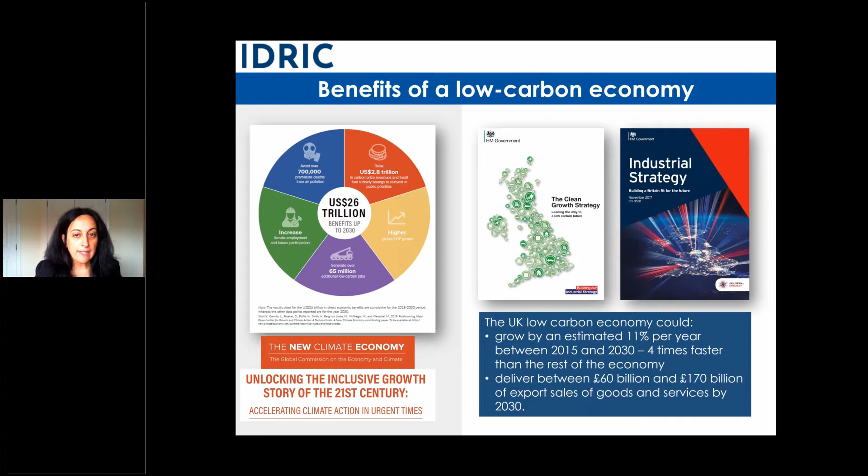So what does this mean from the point of view of the UK setting up this net zero target? Well, if I have to summarize it in just a few words, really what the net zero target means is that there is no place to hide. That's basically what it means.

And I'm saying relatively, because there's really nothing easy in decarbonization. But we have decarbonized to a really large extent our power sector, our power generation, and that is why that overall number of our CO2 emissions is coming down. What we have ahead of us is actually those sectors that are really difficult to decarbonize.

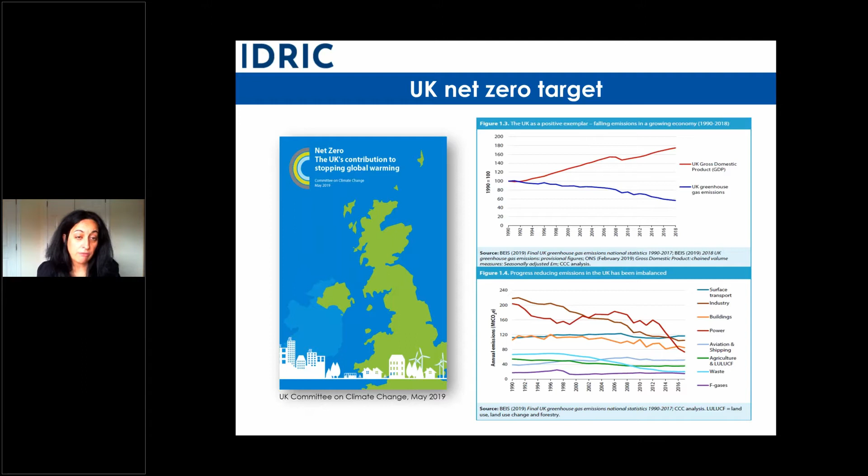So that's really the picture. Going forward, we're going to have to do a lot of different things, and not the easy ones, as I said.

So what mechanisms we have in place, I want to add that these mechanisms are not going to achieve everything that we need to do to decarbonize. These are very important, critical steps right now, but we're going to need a lot more joint efforts to decarbonize the UK.

So that's cement, steel, glass, paper, chemicals, and ceramics. These sectors in the UK, we shouldn't underestimate - they actually produce 52 billion of our UK economy, but they have to be decarbonized.

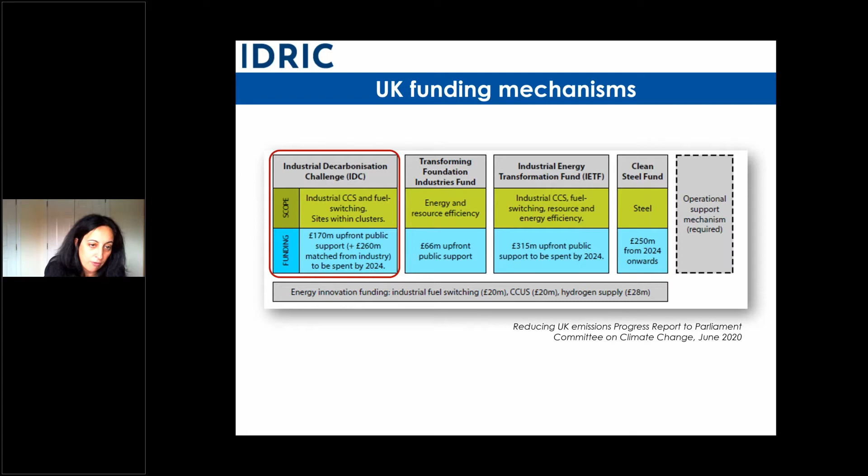All those together, collectively, produce around 40 million tons of CO2 per year. To put this in context - roughly we're looking at around 8%, 7 to 8, below 10% of emissions in the UK. So by taking care of emissions from these clusters, we can go a long way. Remember, these are difficult to decarbonize sectors in reaching our net zero target.

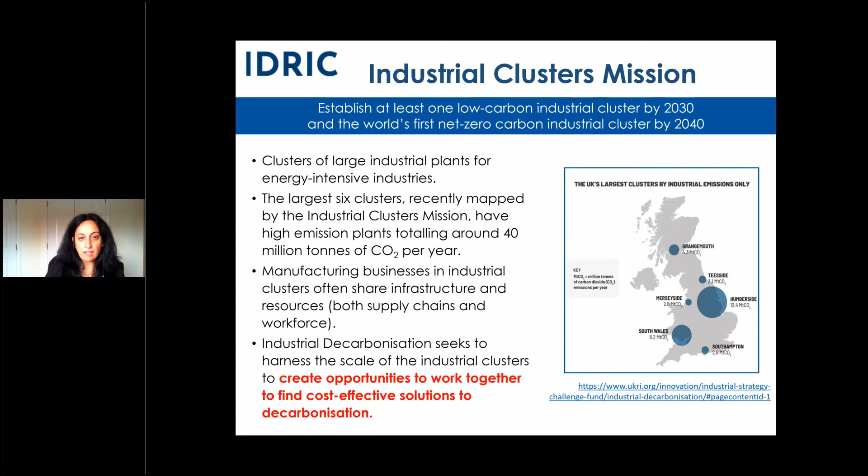The industrial cluster mission - the banner in blue with white letters - is that we want to establish at least one low-carbon industrial cluster by 2030, and the world's first net zero industrial cluster by 2040. Again, this won't be everything we need to do to decarbonize, but it's a significant step in that direction.

So I already mentioned the size of the program. Maybe the other point to mention here is that the overall IDC or Industrial Clusters Mission is divided into 3 activities, or 3 strands. There's a strand focusing on industrial demonstrators and shared infrastructure, which is 132 million and administered by Innovate. A second key element of this mission is the cluster decarbonization roadmaps, or cluster plans as they're known now - an 8 million program, also administered by Innovate.

And the third element that you have there, and that's what I'm going to be focusing on, is the Industrial Decarbonization Research and Innovation Center. That's a 20 million program administered through the Engineering and Physical Sciences Research Council, EPSRC.

A message I want to give here is that the program has 3 elements, but those 3 elements work very closely together, and that's the intention going forward. We do need those 3 together working, because that will be the way to really deliver the objectives of the mission.

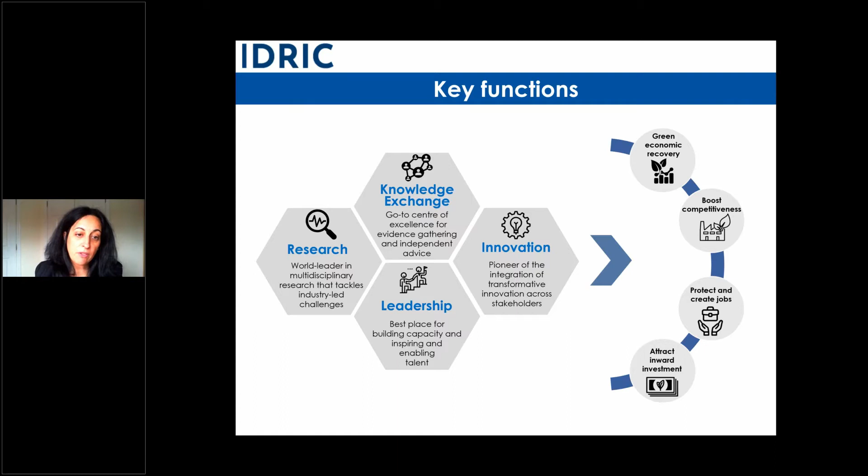Ultimately what we want is that these regions not only stay and flourish, but also attract inward investment. So I've been talking about IDRIC and stakeholders in the community. We actually have 142 partners, 142 different entities. These 142 organizations have come out with a 10 million match support to the funding of 20 million that we are requesting from UKRI.

If you want to see who they are, it's a really good spread. We have 23 research organizations, 74 industrial partners, 35 associations, NGOs, trade organizations, and also working alongside very closely with policymakers and different government bodies and departments.

A little bit more now in terms of the challenges we will be addressing. I think the first key message here is that when you look at emissions globally, they represent around 28% CO2 emissions for energy intensive industries. In the case of the UK, it's more around 21%. Those numbers, of course, may have fluctuated over the last months.

But what I want you to see here is that there are significant regional differences. In the case of Asia, particularly China, not surprisingly, energy intensive industries are much more dominated by non-metallic minerals - meaning cement, ceramics, and iron and steel. If you look at Europe, what we have is actually a more even distribution between non-metallic, iron and steel, and chemicals.

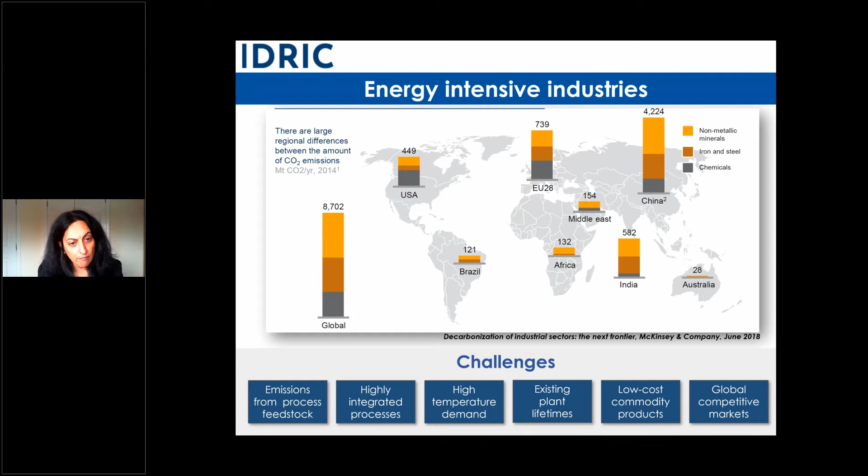So these are the challenges that we will be addressing as part of the Industrial Decarbonisation Research and Innovation Centre, IDRIC. In terms of the options, I'm not going to go into detail.

The options that we have from a technology perspective are around switching to different types of fuels. You can be thinking in terms of hydrogen, in terms of improving efficiency, in terms of how we can electrify heat, energy vectors, CCS, and also other innovations that will be coming along the way.

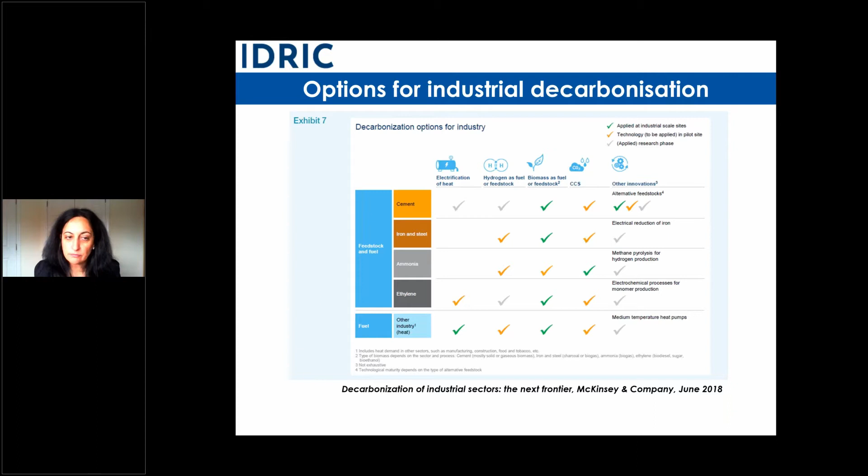Now, important to keep alongside that is that we are going to have different routes. We need to look at this from a holistic point of view. So it's not just a low carbon technology, but also things we can do from the demand side or from energy efficiency, and try to make sure we look at this from a really complete life cycle approach when we look at the chemical sector.

On the right-hand side of that slide, the key message is that there is a time for these technologies. Some of those technologies are already mature and we will be looking to deploy them, or strategies to be deployed straight away. Other technologies or approaches will actually be coming later on. And again, we are going to need every single tool that we have in our toolbox to be able to reach net zero target.

What IDRIC is aiming here to provide is a supporting foundation for technology and policy development. I want to reinforce this because, yes, it is important that we develop and deploy technology - without that, we are not going to reach net zero targets. But when we do that, we need to make sure we also have the policy, the business models and the regulatory framework, and of course the skills related to all of the above.

So project examples, just kind of very generally - we are looking at projects that will help us to reduce cost, reduce risk, reduce the timelines, obviously reduce emissions, and as well linked with all of the above, economic and policy aspects.

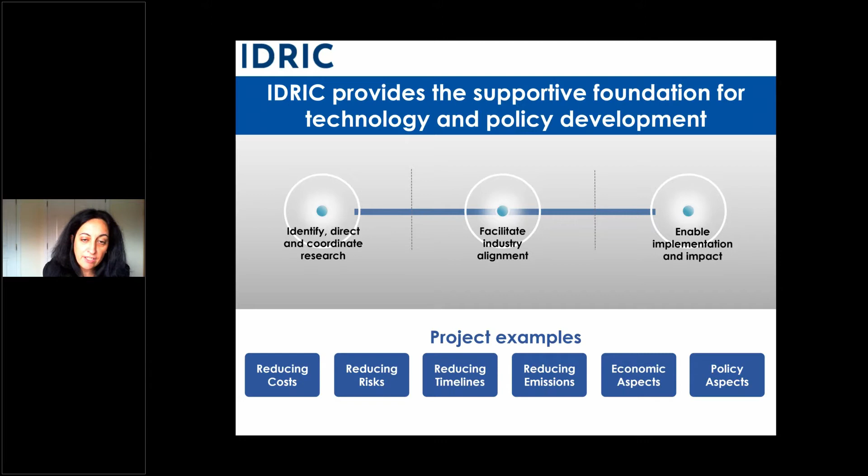The approach that we have taken is we have identified a challenge led from industry. We have facilitated industry alignment for every one of the projects. And this also ultimately will allow us to enable the implementation and the impact of these solutions.

So in summary, how IDRIC can help the UK reach its industrial decarbonisation goals: we will be putting together this research and innovation program, with these industry-led challenges. We are also forming a very active network of stakeholders, as you saw from the number of partners.

And really together, we're going to be growing the skills. We're going to be sharing the knowledge and supporting the policy and providing the evidence needed in some cases to actually get these policy and regulatory frameworks in place.

I have mentioned this several times, but really collaboration is key. Over the last months, we also have published a series of editorials, opinion pieces in different magazines focused around the chemical sector, focused on cement, on steel.

There is one, if I can highlight your attention to the one on the left-hand side, Accelerating Decarbonization. This has just been published in the Chemistry and Industry magazine that is part of SCI.

One final message here, I'm sure this will be mentioned by the coming speakers as well and in the coming webinars: collaboration is key. The role of the industrial chemical sector is key. But also what we need to keep in mind is that by decarbonizing the chemistry sector, the chemical industries, we are actually helping to decarbonize low carbon manufacturing at large.

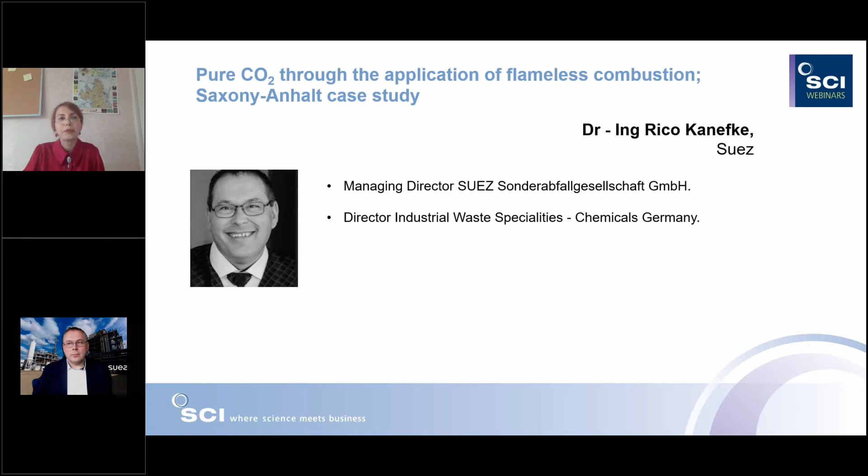Great, thank you for the opportunity to be here. Yes, so I'm working for SUEZ, a French company, one of the global leaders in environmental protection, water, waste, and for sure technology and recycling.

I want to tell you a little bit about a case study we started in the region in Germany. It's the Middle Germany chemical region. And we started a study to check how waste-based carbon could be used to defossilize the chemical production.

Thank you for the opportunity to speak here. I'm an environmental engineer, so I learned to combine environmental protection and industrial needs, and that's my daily job now at SUEZ.

At SUEZ, our purpose is, we think, that we are faced with demographic growth, climate change, and a lot of social and geographical inequalities. So our job for the future and now is shaping a sustainable environment now by keeping for sure the possibilities to produce.

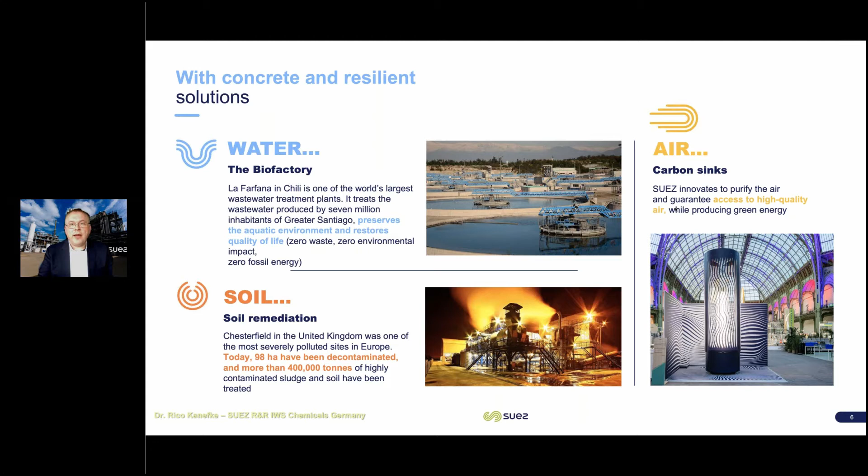And we're working on all the points. It's water, it could be soil, but now I'm talking today about the air and the carbon sinks. So SUEZ is working on innovations for purifying the air, but also working with our industrial clients to defossilize and decarbonize their production.

So let me say a few words about my place in the SUEZ company. I'm the managing director of Industrial Waste Specialties Chemicals in Germany.

Industrial Waste Specialties is a European business unit which is mainly dedicated to hazardous waste recovery and industrial solutions. That means we are in the middle of the real chemical production, and our customers discuss how to drive their business and how to have their business in the future without CO2 emissions while keeping the business working.

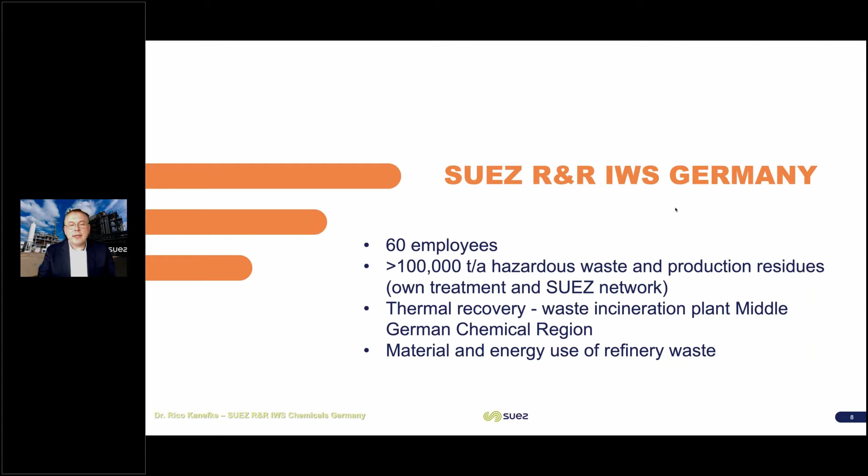So in Germany, we have 60 employees, more than 100,000 tons of hazardous waste. At the moment, we are working with thermal recovery of hazardous waste, an incineration plant in the Middle German chemical region, and also working in the refineries for material and energy recovery.

Let me talk a little bit. The case study we started is in the Middle German chemical region. This is really 100 years and more than 100 years of chemistry.

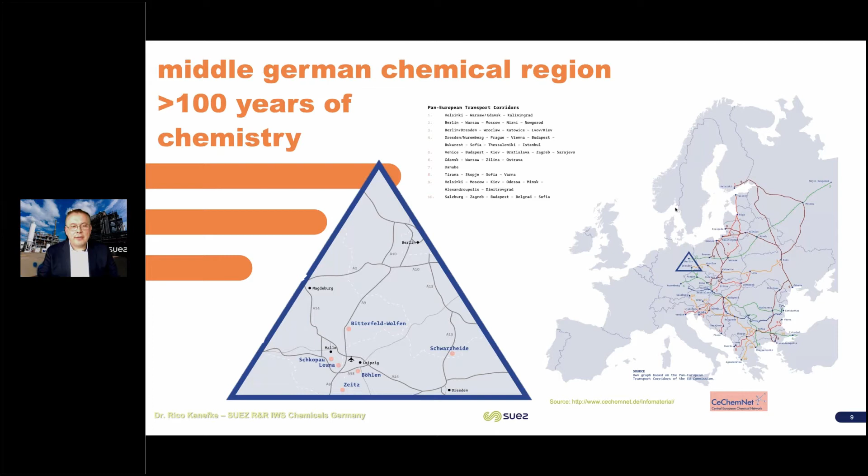And you see where it is, the triangle, the chemical triangle we are actually talking about and working in. This is the eastern part of Germany. You also have a lot of chemical plants in the western part of Germany, but we are situated in this chemical triangle, with more than 100 years of chemistry history. So let me explain a little bit this picture.

Maybe it's hard to read and I won't go into all the details in the short term, but you see a lot of different sites there working on polymers, chemicals, and refinery products. It's mainly based on, and in former years was based on, plastics production, ground chemicals and acids. And there is a lot of pipelines, a lot of working together with intermediate products which is needed at a different site.

We are located in two of these sites I mentioned, the Schkopau site and the Leuna site with our companies. At the moment, this is the status now, we are using our industrial and technical possibilities for thermal utilization of waste from production residues, solvents, hazardous waste mainly, but also non-hazardous waste if it fits, depending on the feedstock we need. For example, in Leuna we make a preparation for the energetic use and material recovery of refinery waste, solvents, and also more complicated mixed waste. So this is what we do now and where we are located.

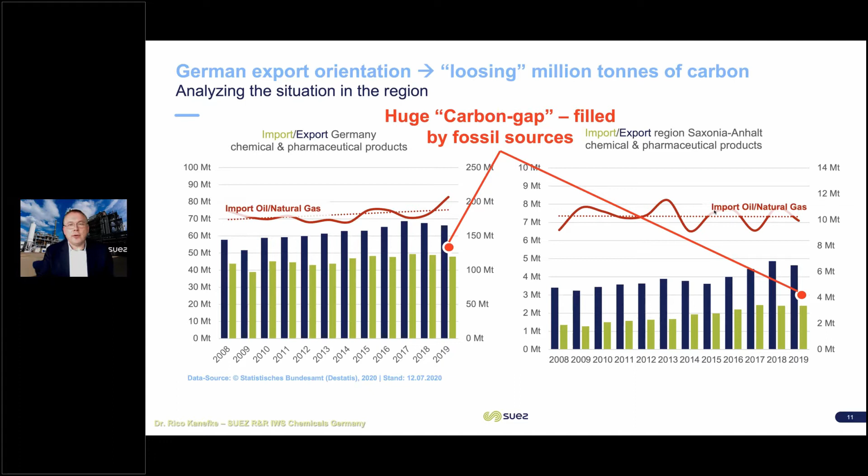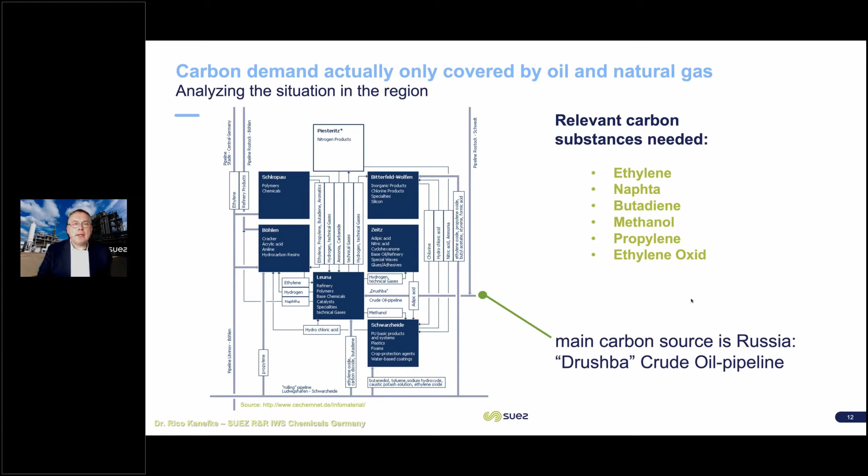If you look again at the picture I showed you before, for the relevant carbon substances needed now in this whole system of chemical companies, you have ethylene, naphtha, butadiene, methanol, and so on. And the main carbon source and area is Russia. We have, from historical times, a good pipeline, the so-called Drushba pipeline coming from Russia, and every bit of carbon we lose, we fill mainly from this pipeline. So we are in this area mainly focused on chemistry based on fossil sources.

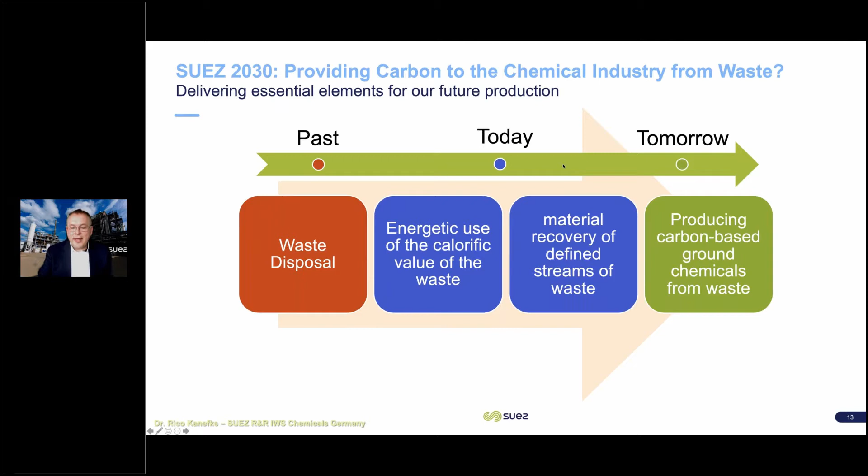So if you look at SUEZ and also other companies dealing with waste, we come from a background of clear waste disposal. We are now in a situation where we use the energy of the waste. We do some material recovery depending on the different streams, like paper, like solvents, also more complicated stuff, but it's only for defined streams. We want to come tomorrow to, let's say, producing ground chemicals from waste. SUEZ 2030 is our broad program to do that. So our case study is what we can do with our known technology, with our knowledge about real industrial technology, to provide for the future the ground chemicals we need in this area - maybe not only in this area, but I'll focus on that.

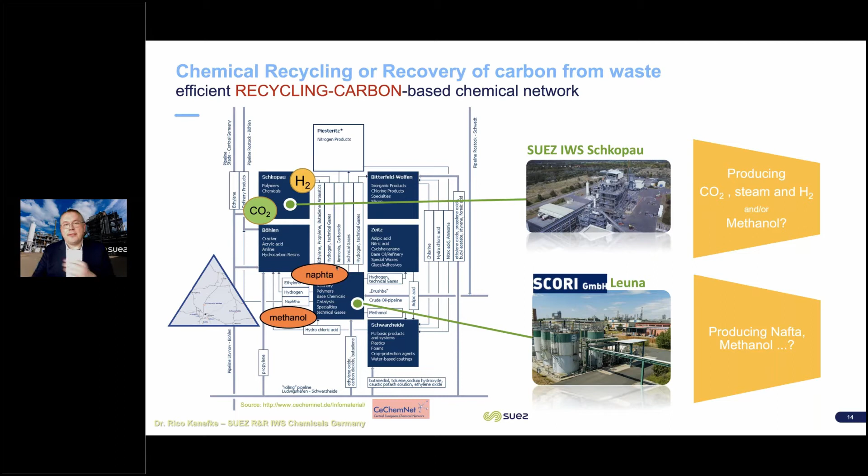What we know already is how to produce CO2. We produce it during our production of energy out of the waste, and for sure we could do way more. So we want to switch the carbon-based chemical network not to a non-carbon-based chemical network. We want to switch it to a recycling carbon-based network.

We are not talking only about CO2. CO2 is only one part of this chemistry. We are talking about hydrogen. We are talking about combined products, methanol, which could be produced from CO2 and hydrogen. But maybe you can also have some carbon sources directly from waste.

So for SUEZ, we are technology open and target open. That means we look at what our customers need, and then we implement the solutions, and we check what are the new technologies. Universities study new products, maybe new catalysts, whatever we can use to bring back the material out of the waste. And therefore we say, I say, we use materials formerly known as waste to have the carbon feedstock for the future.

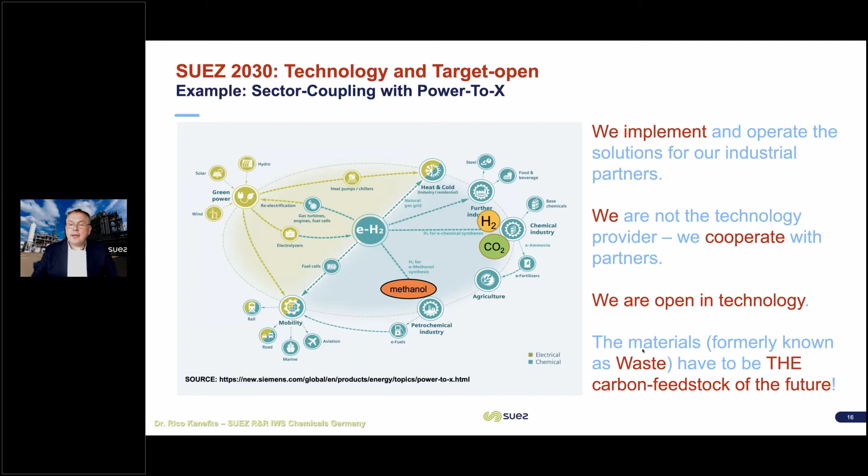So you could also work on very complicated pictures. It's not the time to do that now, and I won't show you a lot of numbers. But we're working with all the materials and all the possibilities. You saw also biomass, for example, in the presentation before, mixed waste, hazardous waste. We have all this feedstock already for using that for creating energy, fuels, and so on. And now it's time to step forward to use this feedstock in different processes to provide the ground materials for the chemical industry.

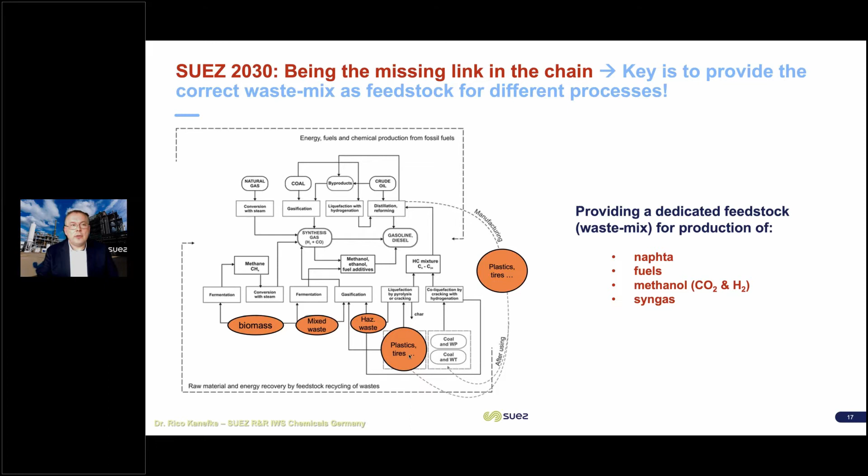Let me show you one example in this study. Thanks to ITEA, Dr. Figini, we worked since some years together with the technology they invented, and we checked where we can use it in our processes. One of the partners, I told you we are technology open, but this could be a solution. I want to introduce this flameless pressurized oxycombustion as the source of waste-based carbon.

So CO2 we also have in our normal incineration plant now, but this is more efficient. If you look not only on financials - we heard also it's always between material, financials, and CO2 savings - if you look on producing CO2, this is a different approach. Then this could be a good idea.

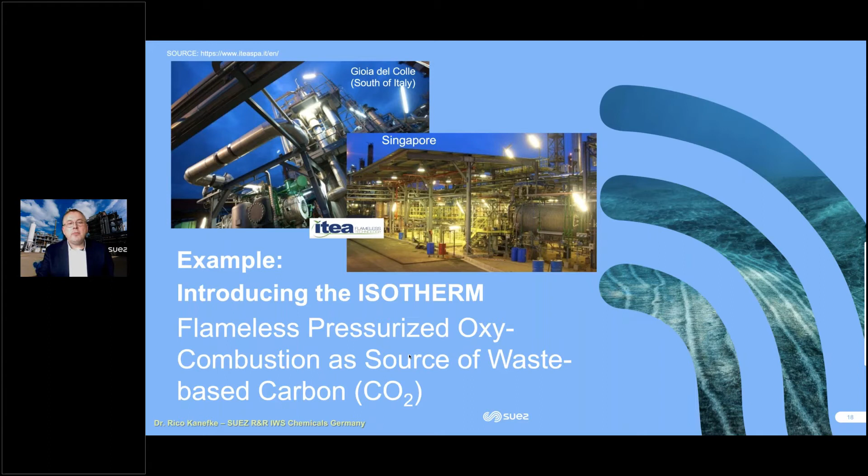If you look at this process, you see it's not a classical incineration, it's an oxidation reactor. So incineration is also an oxidation, but here we're working really only with oxygen instead of air, and we use it with fuel or slurries. The fuel here is waste.

I don't go too much into detail, but the steps are oxidizing, energy recovery, and at the end CO2 recovery. That means this process could provide energy and at the same time CO2 out of a dedicated waste stream. And this is what we check in this area for chemical production.

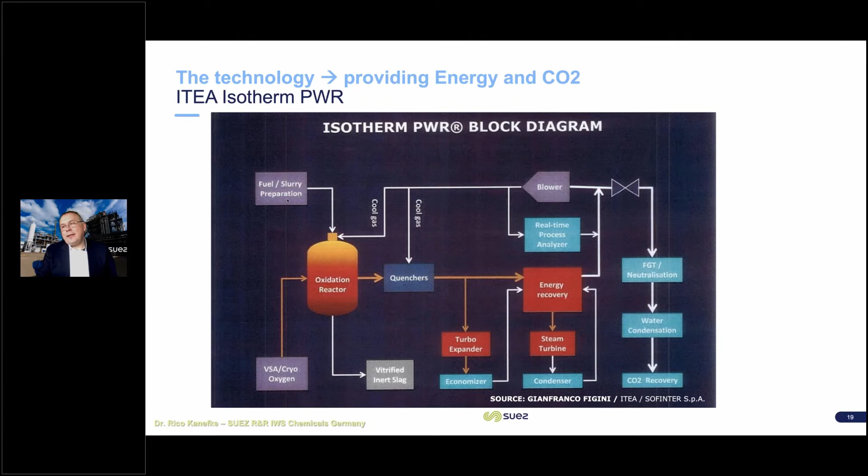What are the advantages or maybe the disadvantages of oxycombustion? For sure, with oxycombustion, because you don't have the nitrogen in the air, you have the mass and volume of the flue gases strictly reduced. That means your plants will be much smaller, much more efficient to build, because you don't have to use the nitrogen of the air for the incineration, and you don't want to have it. So the flue gas at the end is mainly CO2, which makes it very easy and more efficient to capture.

If you don't incinerate nitrogen-containing waste - because otherwise you have the nitrogen from the air - you normally have no NOx emissions, and you have also less heat loss because your flue gas is smaller, and you can build your plant also smaller and more efficient.

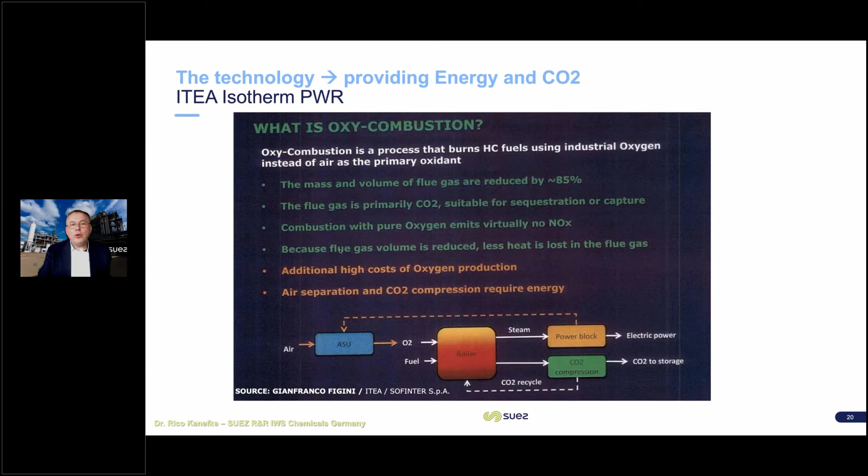On the opposite side, talking about costs, yeah for sure, you have to get the oxygen, and oxygen is more expensive than air - everybody knows that. But this is one point we have to face. And for sure, you need air separation units, and you need CO2 compression or CCUS systems compared to a standard incineration. But we think these are low costs, to be honest, compared to what we get.

For example, I'm not talking about all the possibilities - you can read it in a lot of papers - how to go from CO2 to CO to methanol, including hydrogen and so on, with electrocatalytic reactions. This is not my point here, but we have these technologies, and I think we're getting nearer to an industrial technology here. But I want to show you how we could and how we want to use this in the future.

I start from the incineration. I could also start from the product life cycle. If you have a cycle, then you can start wherever you want.

So I start with the flameless oxy-combustion, for example, which creates energy and CO2. Then you go through these reactions and all the other possibilities to get from CO2 to something you need. In our chemical parks around the middle German chemical region, you need CO2 directly, but also methanol and other carbon-based stuff for chemical production. You need more energy than you can create from the waste, but we can use energy from renewables, so this isn't really a CO2 problem for us. There could be a good combination between the two.

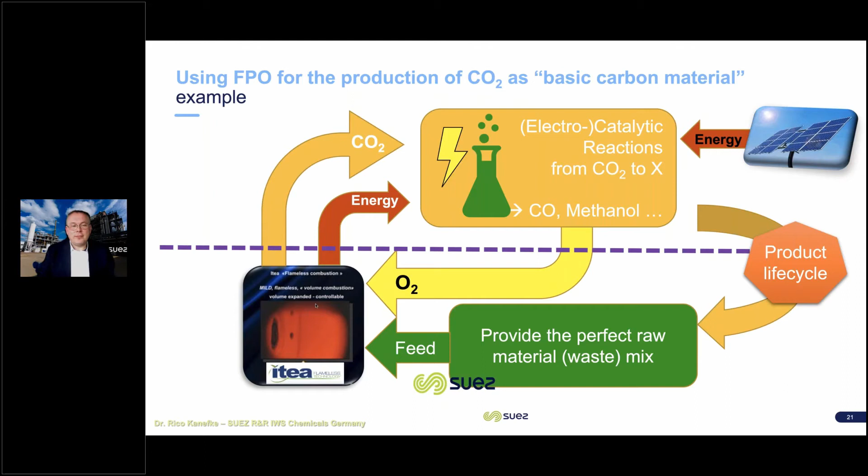If you look at this carbon cycle, SUEZ wants to be the missing link in this chain. You have the chemical companies, they've produced for over 100 years methanol or other carbon-based products like plastics. We know the production of carbon substances like methanol now. Then you have the product life cycle. We know how to collect the secondary material, and we also know how to provide a new carbon source from this material. We also look at what is the best solution: is it a small, flexible on-site solution, or maybe a large-scale one to prevent too much transport?

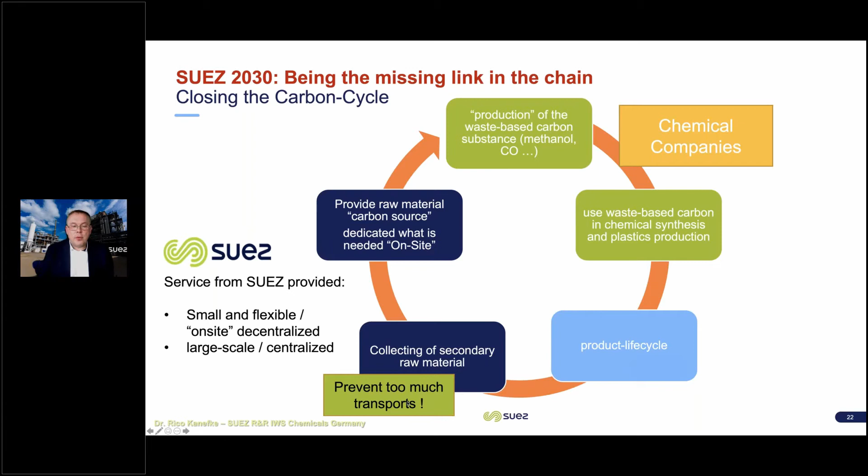Just to show, it's not only incineration or oxy-combustion, we are technically open and look at different possibilities too. I want to show you a second example from the UK. I think since 2013 there's a plant, Cynar and Suez, the first secondary fuel plant, which uses plastic, again a carbon source, through different steps, not getting to CO2 but getting to diesel fuel.

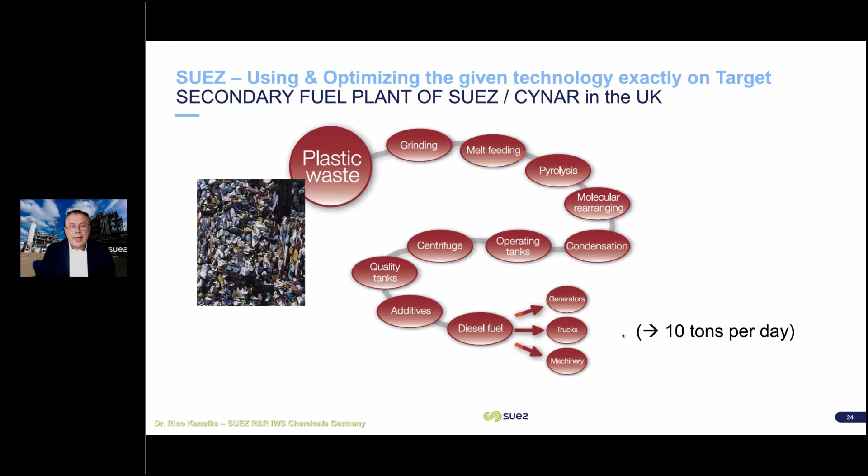But to be honest, whatever you do, it helps you decarbonize your chemical production. Looking at the time I have, I think I have to come to an end soon. I want to summarize - sorry for not going more into numbers and details of the processes. If you are interested, please contact us. Collaboration is key.

Yeah, we heard that before, it's the same for us. We are only one part of this chain, but what we see is that it's possible, and it will be possible in the near future. We are not talking about centuries, we are talking about years, maybe. But we are not so far away from defossilizing the chemical production.

If you look at Germany and our region, we have to close this carbon gap because we cannot always import oil. So we're using the waste - formerly known as waste, now secondary raw material - instead of fossil sources. Besides the standard sorting and standard recycling we all know, we now use chemical recycling, for example, by producing CO2.

As a company we know since long time the needs of our chemical production, and we want to fit to it. It's very key to be technology open - there will not be one technology, there will be, in our case, a lot of technologies that have to fit into the chemical production. We can solve the problem of the different technologies by providing the perfect dedicated feedstock for them. For example, these technologies like the ITEA isotherm oxycombustion I've shown you can efficiently provide CO2, which can also at the end be used as ground product for the chemical industry from a dedicated feedstock we provide.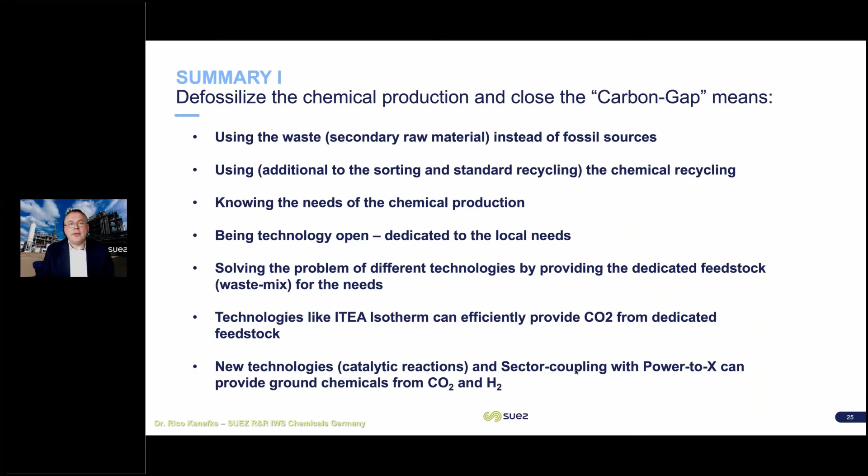No, it's raw material, and this is also very important to know. If you look to SUEZ 2030, we want to be the missing link in this carbon chain, not only in carbon, but in this carbon chain.

So we use the carbon sources from the materials formerly known as waste, not only in the Middle Germany region, but we are very near there now. And we do that to prevent CO2 emissions.

We think it's the only way to secure this chemical production in this region for the future. Otherwise, we have to stop that, so it would be a huge impact on this region.

It's also reducing our dependence from oil, gas, and countries like Russia. It's not only a dependence on the carbon or the oil, it's also a dependence on the countries. And we think it is the way to keep our wealth in this region for the future. Maybe it's the only way, because besides the chemical industry, there's not much in this region.

So let me thank you for your time, and I hope I kept my time. And sorry for not having more detail, but you see, we are not so far away from using CO2 as ground material for chemical production.

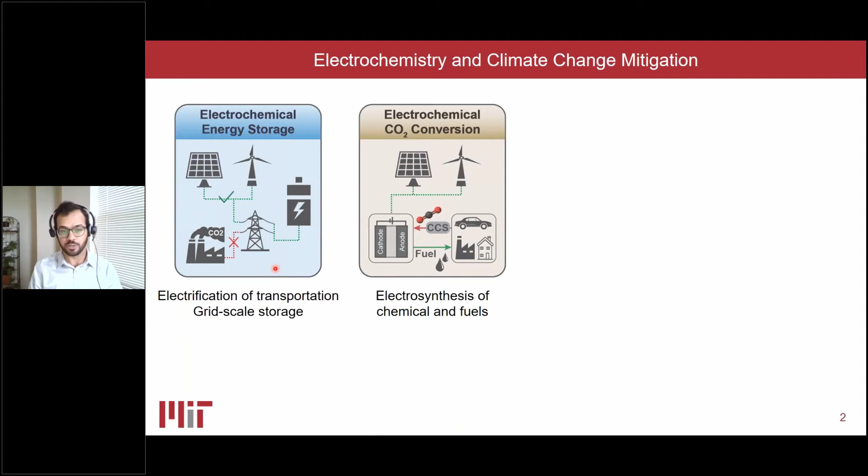The other example of using electrochemistry for tackling climate change is electrochemical CO2 conversion, in which we use renewables as a source of energy and CO2 as the initial material to produce chemicals and fuels. These two technologies help climate change by avoiding further emission of CO2 and by reducing fossil fuel consumption—rather than fossil fuel, we rely on renewables or these new chemicals or fuels produced through electrochemical CO2 conversion.

Another way we can use electrochemistry to tackle climate change is using electrochemical processes for carbon capture and storage, which is considered to be a new frontier of electrochemistry for climate change. This technology helps by avoiding further emission, by capturing CO2, and it can also serve as a negative emission technology.

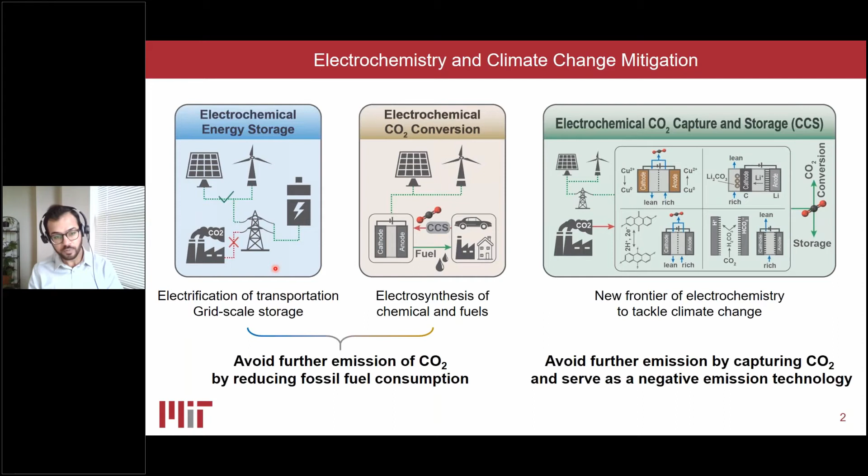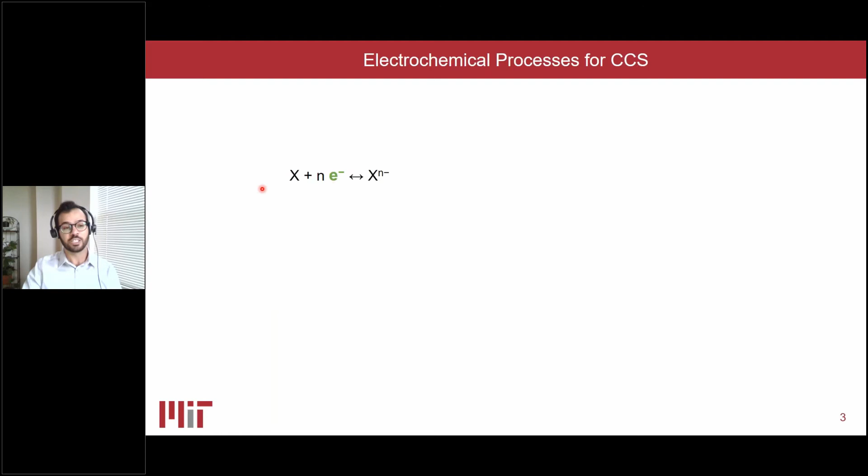So the main focus of my talk today is electrochemical CO2 capture processes. To refresh your mind, an electrochemical reaction is basically a chemical reaction with electrons. Having this electron in the reaction gives us the ability to integrate renewable sources of energy and electricity as a driving force to go forward with the reaction, or go backward and generate electrical current, like when we discharge our cell phone battery.

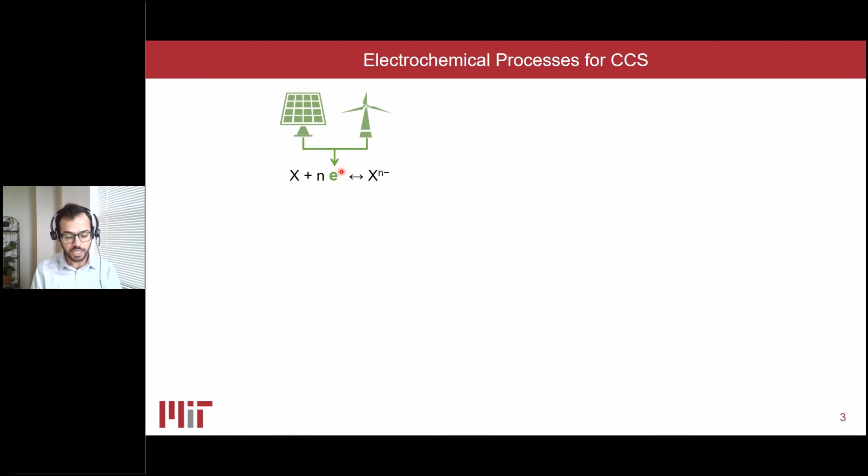Electrochemical systems have unique advantages. For example, they rely on renewables, they are modular so it's easy to scale up, and it's easy to retrofit—it's a plug and play system. So why not use this as a new alternative for carbon capture, as an additional asset to technologies we already have, like absorption or membrane-based systems?

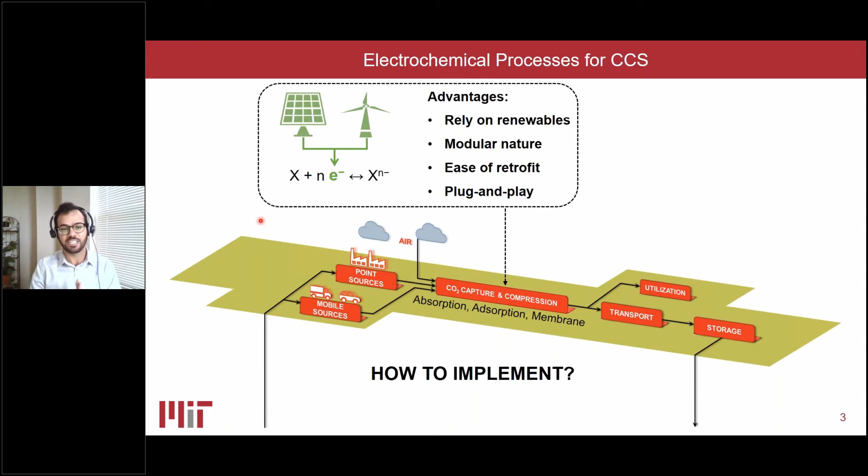This can be implemented for carbon capture from different sources, for example air, other point sources, and mobile sources. But the key question here is how to translate these fundamentals of electrochemistry into a system that can selectively capture CO2 from a mixture.

In this talk, I'm going to review 4 groups of approaches that we can use to translate electrochemical fundamentals into a system that can selectively capture CO2. For the first 3, I'm going to overview the process, and I'm going to spend more time on the 4th one, electrochemically mediated amine regeneration, to give you a taste of how we can go from fundamentals all the way to designing a system that can be used for industrial flue gas, for example.

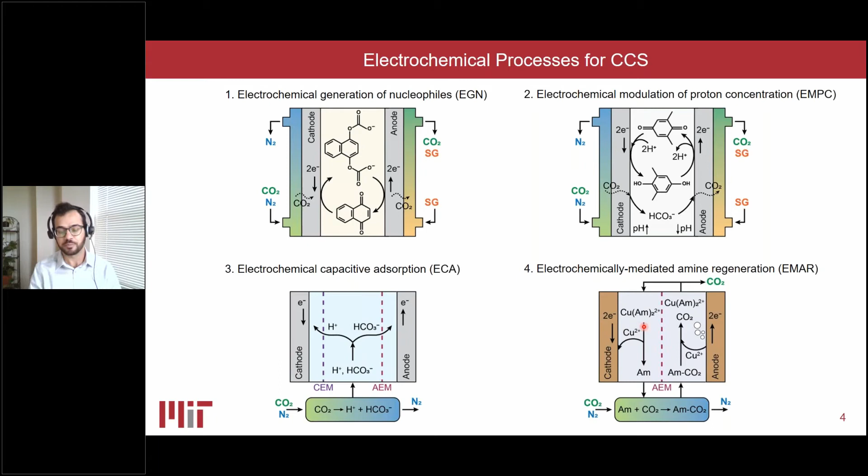For the first one, we have electrochemical generation of nucleophiles. The core idea is we electrochemically generate a nucleophilic center, for example, using an organic molecule like a quinone molecule. By reducing this, we generate a nucleophilic center which is attractive for CO2 from its electrophilic carbon center.

As a result of this reduction, we have a chemical reaction with CO2, so we can selectively capture CO2 through this reaction. In order to regenerate this molecule and produce a pure stream of CO2, we just need to go backward with this reaction, doing the oxidation of this molecule. So by going back and forth between oxidation and reduction, we can selectively capture CO2 and then remove it as a pure form of gas.

Quinone, of course, is not the only example. There are other examples, such as bipyridine or thiolate. The key similarity between all of these molecules is that by reduction of them, we produce a nucleophilic center which can selectively capture CO2. To use this fundamental in a system, I'm giving you a schematic that shows how a process relying on this mechanism works.

On one hand, we have a mixture of CO2, let's say with nitrogen. We have a gas diffusion electrode, and on the cathode, where we do the reduction of this molecule, we selectively capture CO2. Then, on the other side of the cell, we oxidize this molecule in order to release CO2 in its pure form, which we can wash out using a sweep gas.

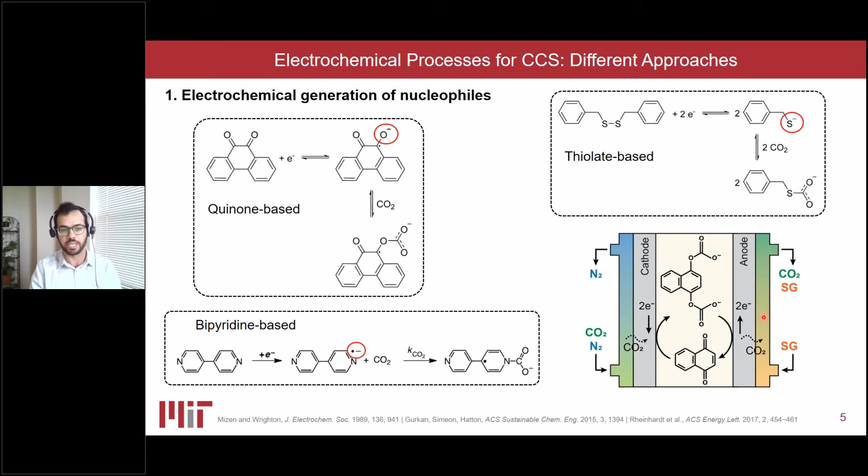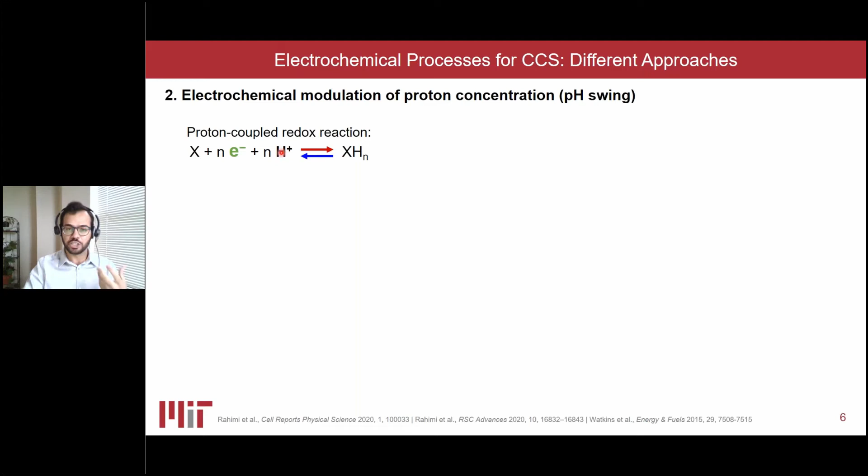The other way is using electrochemical modulation of proton concentration, or pH swing. A group of electrochemical reactions called proton-coupled redox reactions, in which in addition to electron transfer, we also have proton transfer. That means if we go forward with this reaction, we consume protons, and if we go backward, we generate protons. That means we can play with the pH of a solution.

We also know that CO2 solubility is a pH-dependent process. That means we can absorb CO2 as bicarbonate and carbonate at higher pH and desorb it at low pH. So basically, taking advantage of this pH sensitivity, combining it with a reaction that can modulate pH, we can design a system that captures CO2 as bicarbonate and carbonate and desorbs it as CO2 gas.

So this system's mechanism is relatively simple, but the kinetics might be slow because of the slow kinetics of the absorption itself. People use this type of mechanism to design systems.

For example, here they used a soluble organic molecule with a proton-coupled redox reaction, in which by reduction of that molecule, involving protons, they can locally increase the pH. So they absorb CO2 as bicarbonate on this side of the cell.

Then, by doing the reverse reaction—in this case we have hydroquinone and benzoquinone—by oxidizing the hydroquinone, the pH of this section of the reactor goes down, and then we can desorb CO2 in the form of gas. Similar to the previous system, we just use a sweep gas to wash it out.

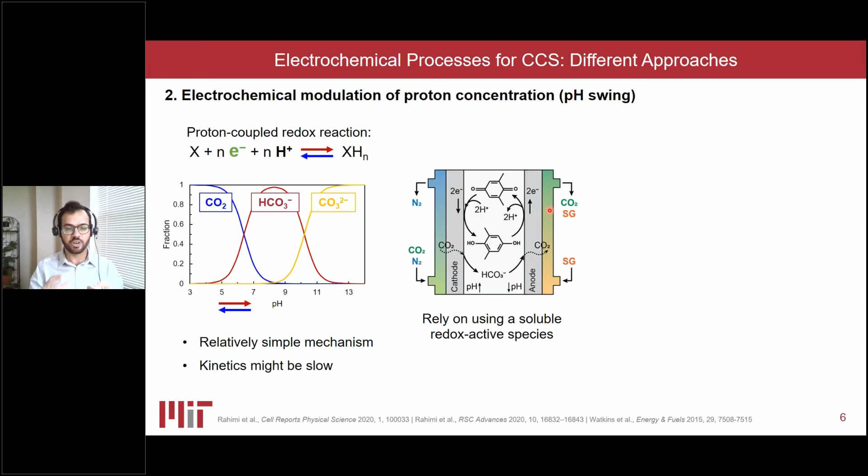This relies on an organic molecule which is soluble and redox active. We can also use an electrode that can host protons. In that case, the electrode itself can intercalate and deintercalate protons in order to modulate this change in pH.

For this particular configuration, I'm using an absorber, absorbing CO2 as bicarbonate using, let's say, potassium carbonate, sending it to the anode chamber of that electrochemical cell, which is separated using an anion exchange membrane. Here, I'm increasing the pH in one chamber and decreasing the pH of another particular chamber by introducing protons, playing with the equilibrium of bicarbonate and carbon dioxide in order to remove CO2.

Then, on the other hand, I'm regenerating the pH in order to make it ready for further absorption and sending it back to the absorber. So basically, we're taking advantage of CO2's sensitivity towards pH and playing with electrochemistry in order to capture and release CO2 selectively.

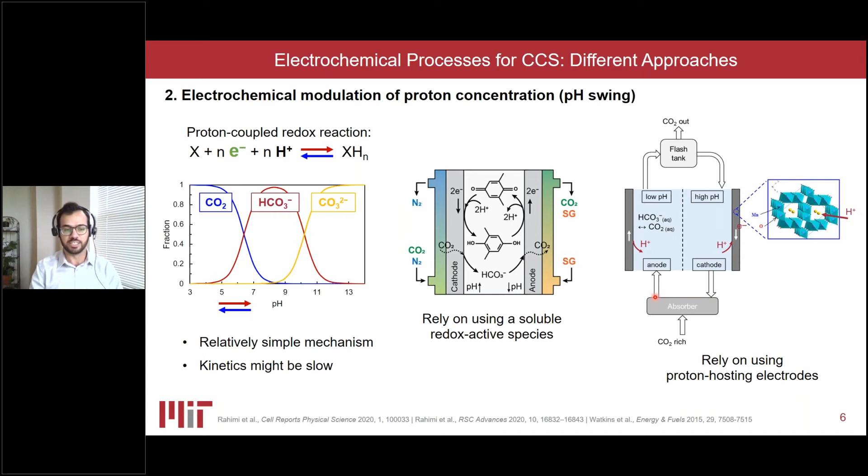So the third mechanism is relying on a capacitance, electrochemical capacitive adsorption. Similar to the previous case, I'm absorbing CO2 using an absorber, then absorbing as bicarbonate, and then sending it to an electrochemical cell, a capacitance.

In this case, what I have is a one-chamber electrochemical cell with two anion and cation exchange membranes. These are ion selective membranes. When I charge this electrode, I'm selectively adsorbing this ion on the surface, so I'm selectively removing this bicarbonate from the system. By reversing this, I can remove the adsorbed ion, wash it out, and generate a pure CO2 stream. These fundamentals of capacitive adsorption were used to design a hybrid system.

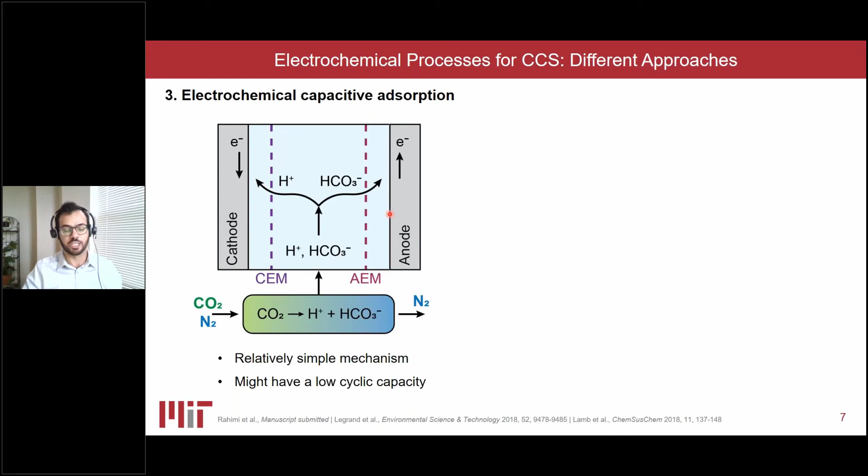This is a relatively simple mechanism, but the concern is the capacity is low because it relies on a double layer capacitance, which is normally low. So this fundamental was used to design a hybrid system in which they not only do the adsorption on double layer as bicarbonate, but at the same time in the same cell they mix it with a metal ion and do the mineralization at the same time. So basically we do the adsorption and then in the same cell do the mineralization. This hybrid process is a capture mineralization system. That's basically how we do electrochemical capacitive adsorption to selectively remove carbon dioxide from a mixture.

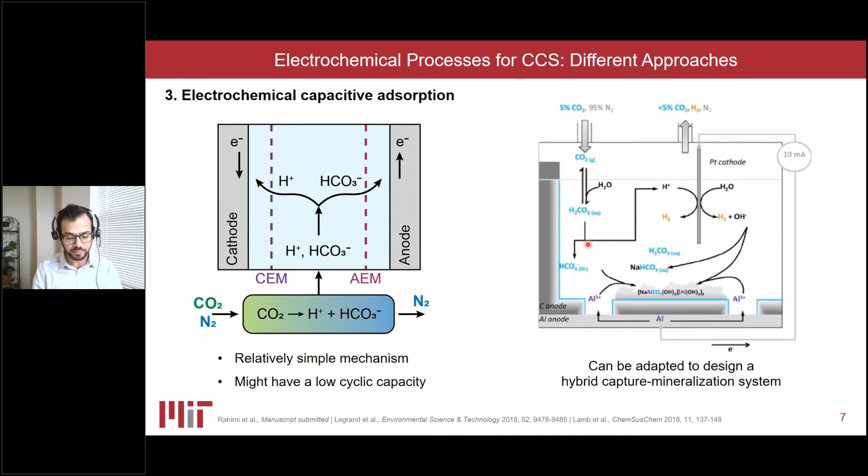The fourth method is using electrochemistry for regenerating amine, a process called electrochemically mediated amine regeneration. This process was heavily inspired by conventional thermal processes using amine scrubbing. In a thermal conventional process, the absorber does selective removal of CO2 using an amine, let's say ethylene diamine, generating carbamate. Then, to break the bond and desorb CO2, we send it to a high temperature desorber, apply heat, break the bond, regenerate the amine as the absorbent, and remove CO2 in pure form. So this is how we go from selective capture to removal of CO2 using conventional thermal processes.

The core idea of EMAR, electrochemically mediated amine regeneration, is to replace the high temperature desorber with an electrochemical cell. We have the same absorption mechanism as the thermal one, selectively removing CO2 using an amine. Instead of applying heat to break this bond, we electrochemically introduce a metal ion, for example copper. This metal ion can bond with the amine stronger than amine with CO2. So at the end of this oxidation cycle, we have a metal-amine complex and desorption of CO2 from the anode chamber, which we can remove easily.

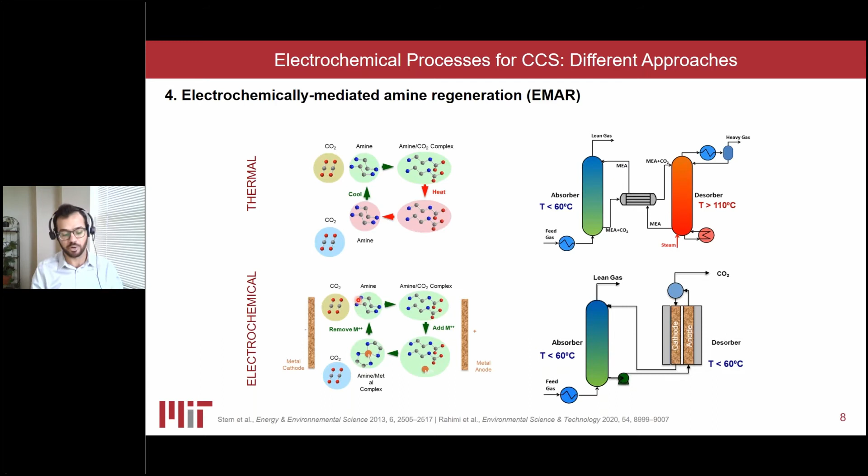But then we need to regenerate the system because we need pure amine again. That's what we do on the cathode side: we electrochemically deposit the metal ion on the surface of the electrode, ending up with that metal surface and regenerating amine to send back to the absorption column for further absorption, repeating the cycle. That's how the EMAR process works. Ideally for EMAR, we're looking for a continuous system with absorption and desorption combined, so we can run, for example, flue gas removal for long-term operation.

Before jumping into that relatively complicated configuration, we needed to further study the fundamentals of the electrochemical reaction itself, answering many questions before designing the actual experimental setup. Here's one example question to show how to design a smaller scale experiment to answer a particular question before designing the actual experiment: what is the electron utilization for this system? By electron utilization, I mean how much CO2 we can desorb per mole of electron we're putting into the system. That's a key consideration when designing an electrochemical system.

What is the efficiency of this system? To refresh your mind, in the case of copper as the electrode and ethylene diamine as the amine, on the anode side, the desorption chamber, oxidation of 1 mole of copper withdraws 2 moles of electrons. This mole of copper can react with 2 moles of EDA-carbon dioxide, resulting in desorption of 2 moles of CO2. So ideally we have 2 moles of CO2 for 2 moles of electrons, meaning the electron utilization is 1.

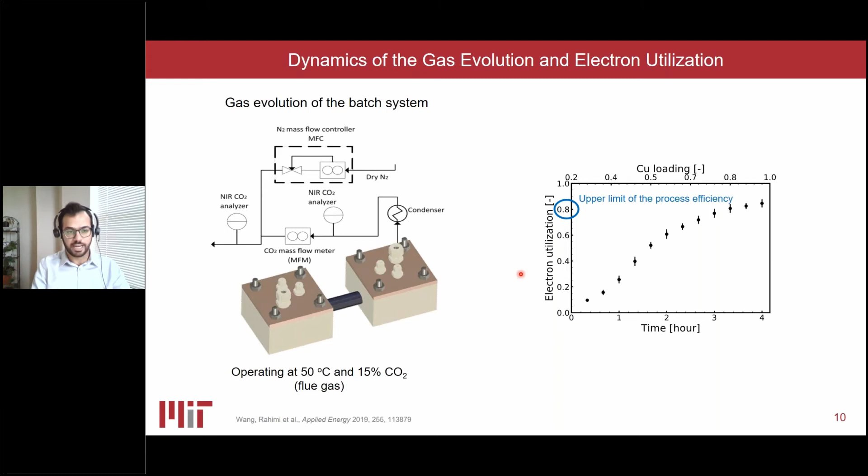This was an example of how to find answers to fundamental questions, which can later be used when we design the actual experiment. Those fundamental experiments are mostly around the electrochemical cell itself, but this is just one part of the actual process. What we need to do is study the actual integrated process from absorption to desorption, continuously.

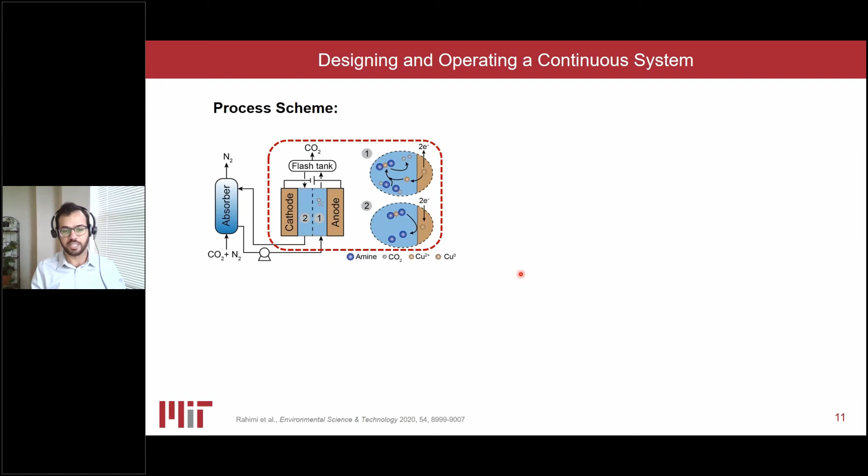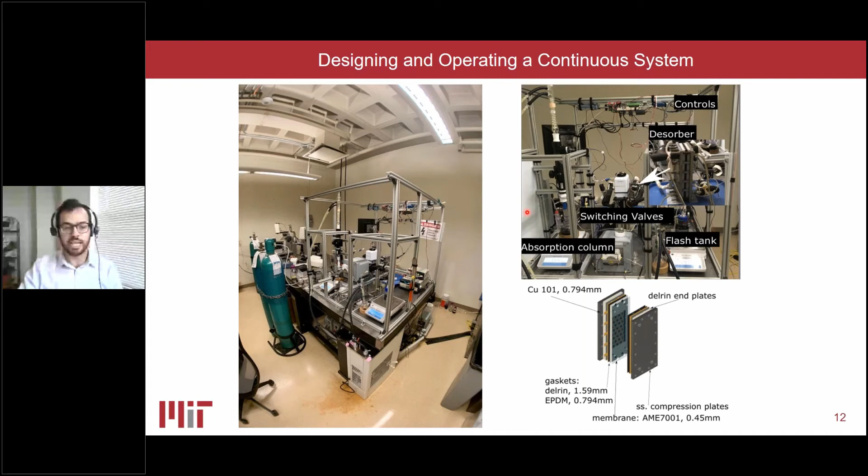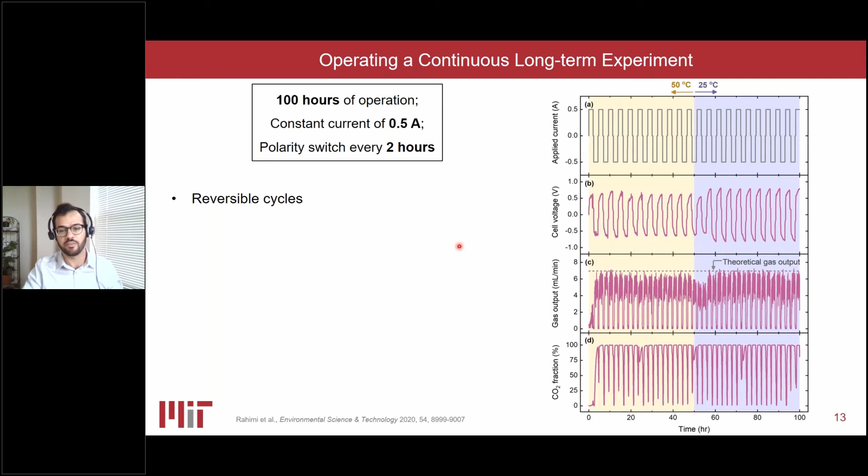The system was very reversible for the 2 ranges of temperature we worked on, 50 and 25. The gas desorption was due to the electrochemical current we put into the system. For example, when there is no electrical current to the system, there is no gas production. The gas production is also very close to the theoretical value.

This represents 80% efficiency. That's how we use what we've learned from the smaller scale experiment when we operate a long-term experiment, representing that 80%.

By showing this graph, I'm also showing the quality of the gas being desorbed, and this shows 100% CO2—no vapor, no amine vapor in the desorbed gas. It's pure CO2. So I hope I was able to show how to go from a fundamental electrochemical reaction to a proof of concept scale experiment, and all the way to a more integrated experiment, including absorption and desorption.

The same systematic study can be done for other mechanisms and other approaches of electrochemistry that I showed at the beginning of the presentation. So to wrap up, I want to go back to all the different mechanisms of using electrochemistry to selectively capture CO2 for a wide range of mixtures, for example from flue gas or high concentration CO2 streams, and also air.

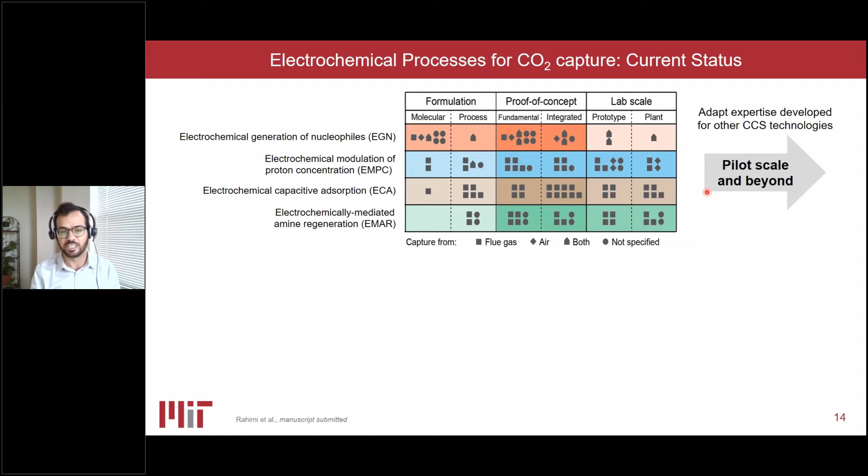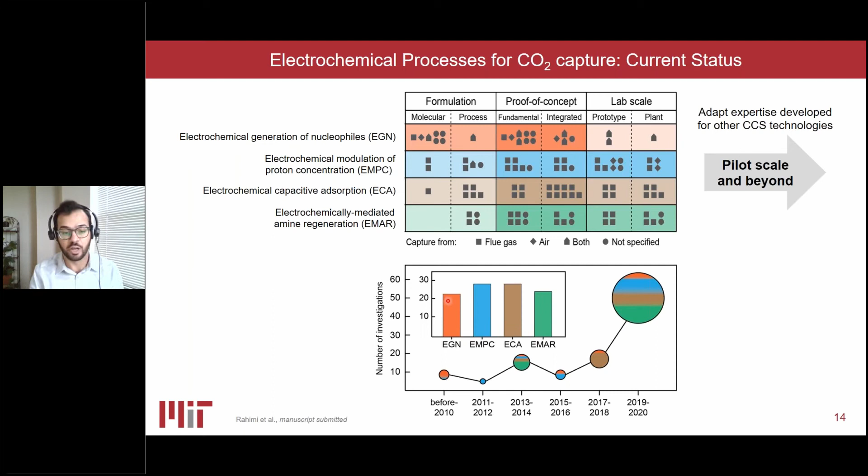I'm pretty optimistic about this route of CCS, because if we look at the number of investigations in the last 2 years, we see that most of the investigation was done recently and is still growing. I think there are exciting years ahead for this technology as an additional asset to other CCS technologies.

In conclusion, I showed a variety of different approaches using electrochemistry as a powerful tool to selectively capture CO2 from either source points or air, and this can be further optimized and improved at larger scale, at pilot scale and beyond.

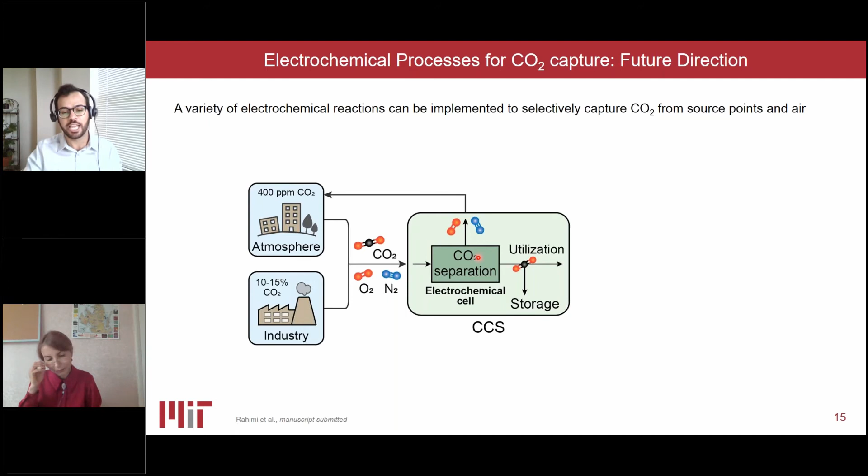As a future direction, what can be done is connecting this unit, because we're producing pure CO2, to a CO2 conversion unit in order to produce chemicals and fuels and close this carbon loop. This is particularly interesting because the nature of the energy required for these two technologies is basically electricity, so we need to provide the same infrastructure for both.

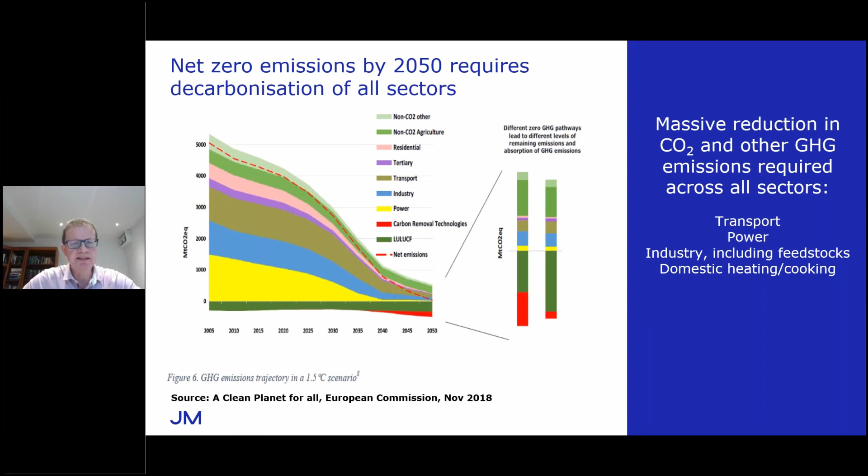When we look at the UK context, the UK's previous target for greenhouse gas reduction before we committed to net zero was 80%. As we made that transition from 80% to 100%, the Committee on Climate Change said that making this move changes hydrogen from being an option to an integral part of the strategy. What we're seeing all over the world now is the recognition that we're not going to be able to get to net zero without significantly increased use of hydrogen. And of course, that needs to be low carbon hydrogen.

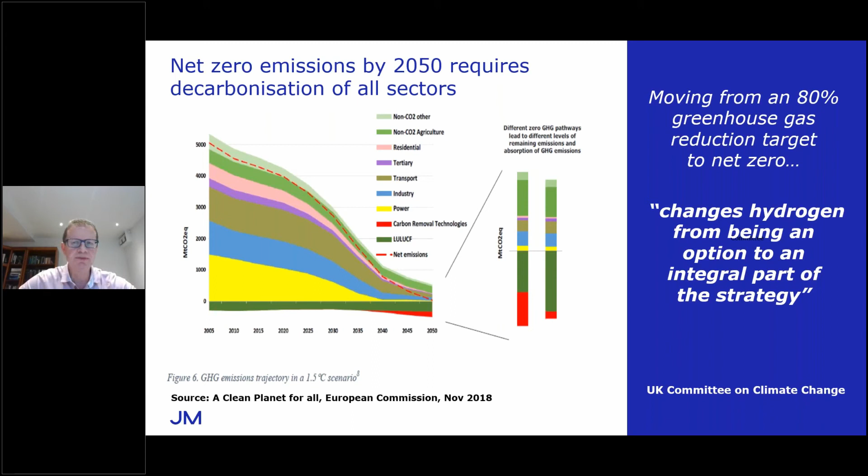When we look at how this is going to shake down, in general, if you can electrify things, you would tend to do that. So renewable energy and electrification is the kind of thing that's going to be powering battery electric vehicles, heating most homes and businesses through electric heat pumps, lighter industrial processes, and already extensive electrification of rail networks across the world.

But when we look at some of the things that are more difficult to decarbonize, those harder to abate sectors, this is where hydrogen really comes into its own. Within industry, some very highly energy intensive applications, high temperature processes - you look at steel manufacture and things like that. You look at heavy duty transportation, so long haul trucks, heavy commercial vehicles - putting batteries into those as the primary power source doesn't really make sense.

They'd need, in order to get the range needed for those applications, the batteries would need to be very big, which makes them very heavy, also makes them very expensive, and a lengthy time to recharge. So hydrogen powered fuel cells will be the dominant technology as we look at heavy duty transportation.

As we see, some of the larger and long range light duty passenger transport will also move in that direction. Some rail applications too, but as I say, the majority of rail we expect to stay electric. And then we look at perhaps the two most difficult to decarbonize within the transportation sector: aviation and marine.

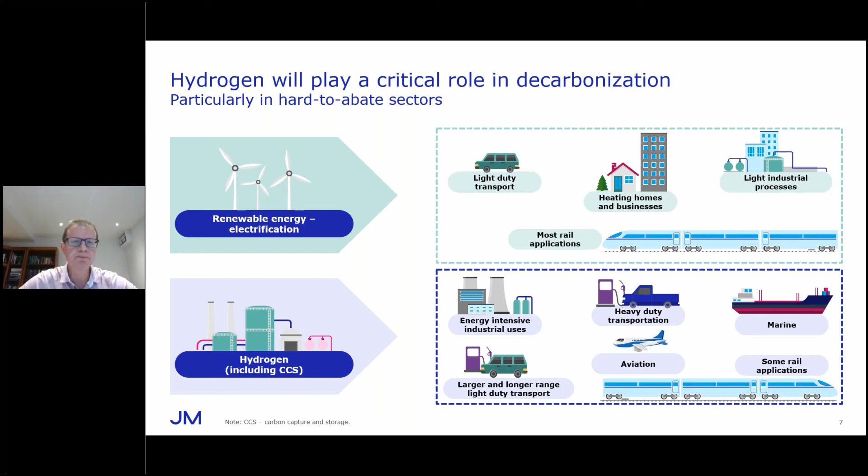So looking at the U part of CCUS in a sense, the utilization part.

One of the main reasons to do this is the world is going to continue to need carbon-based products. Look at chemicals, plastics, fuels - some fuels will need to be drop-in fuels for the foreseeable future rather than electrifying some forms of transport. So there's a good opportunity to make these renewable using CO2 captured from industrial processes, for example, and then used in the utilization phase.

Going forward, far more focus on the use of biomass and direct air capture as the two sources of CO2. The other advantages are reducing CO2 emissions by reusing them, reducing the use of fossil carbon, and then there's also the economics as we look at where the world is going in terms of emission trading schemes and carbon pricing.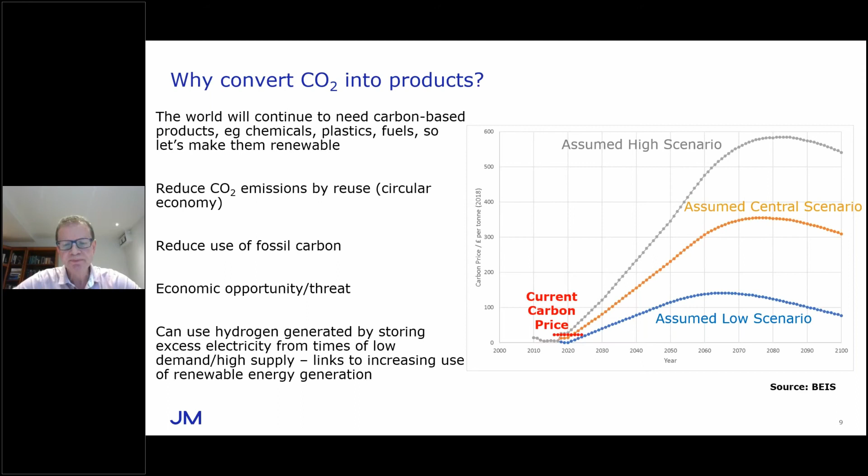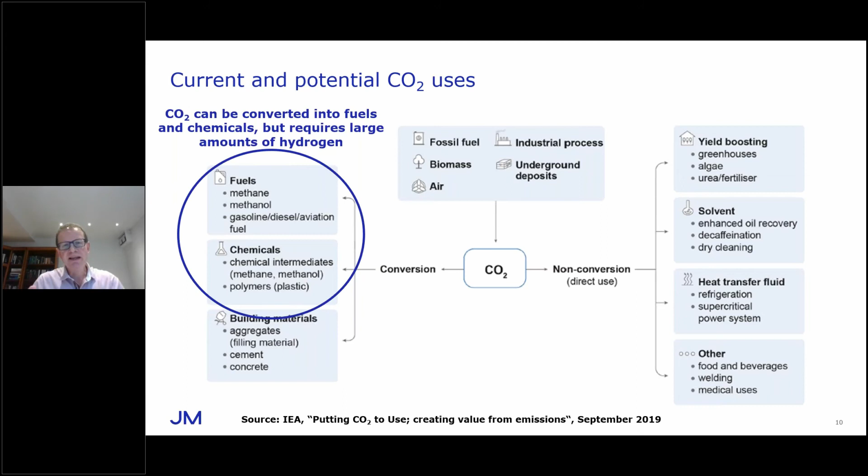But there's also a significant number of opportunities that involve conversion. Fuels and chemicals we've talked about - Rico mentioned both of these earlier. CO2 can obviously be converted into fuels and chemicals, but it requires very large amounts of hydrogen, and to make this a renewable, net zero compliant route, we need that to be low carbon hydrogen. There's also quite a bit of work going on to use CO2 in building materials, aggregates, and cement, which is an interesting twist given the concrete industry today is one of the largest emitters of CO2 globally.

There are also many options - lots of things you can make from CO2 and several routes as well to fuels and chemicals if we focus on those.

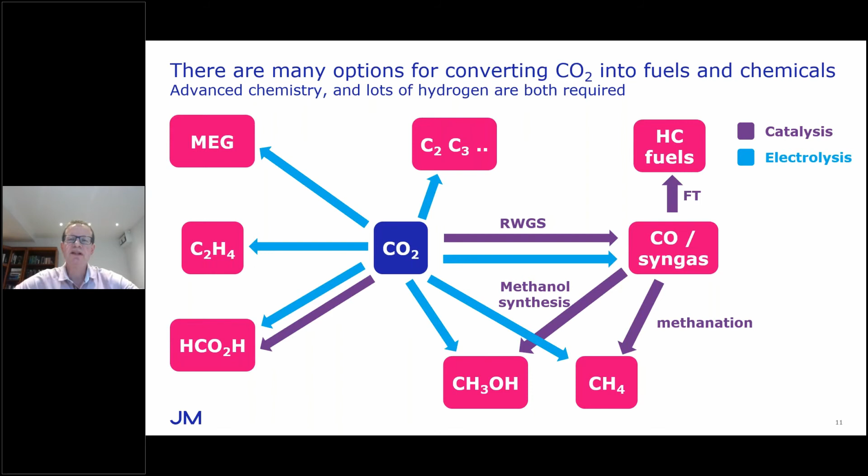So, for example, with sources of CO2 you can use the electrochemical route. Building on the presentation Mim gave, there's a lot of opportunities for electrochemistry going into the future - electrochemical conversions, but also, shown in purple, more conventional catalysis to take CO2, using reverse water gas shift to CO to syngas, enabling us to then use a series of well-established processes and catalysts such as methanol synthesis and Fischer-Tropsch, with Fischer-Tropsch being used to generate hydrocarbon fuels, for example.

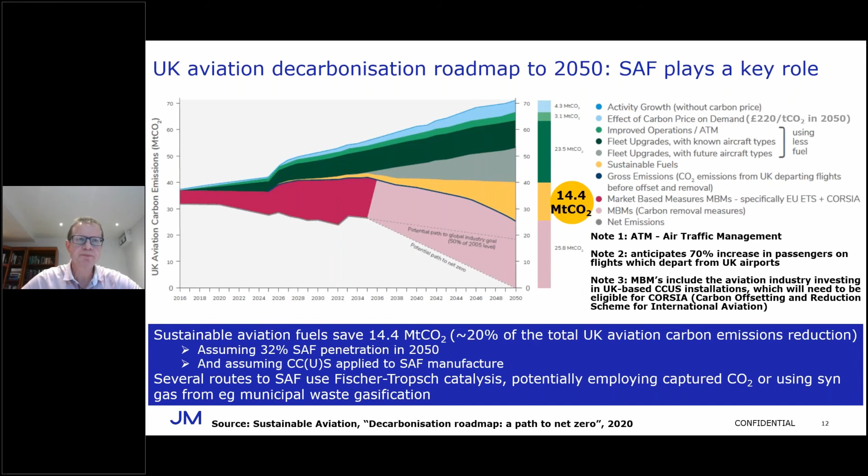for example, with the potential of hydrogen dominating that particular sector. So coming back to hydrogen, we can make hydrogen in a number of ways, but obviously to move towards net zero, this needs to be low or zero carbon.

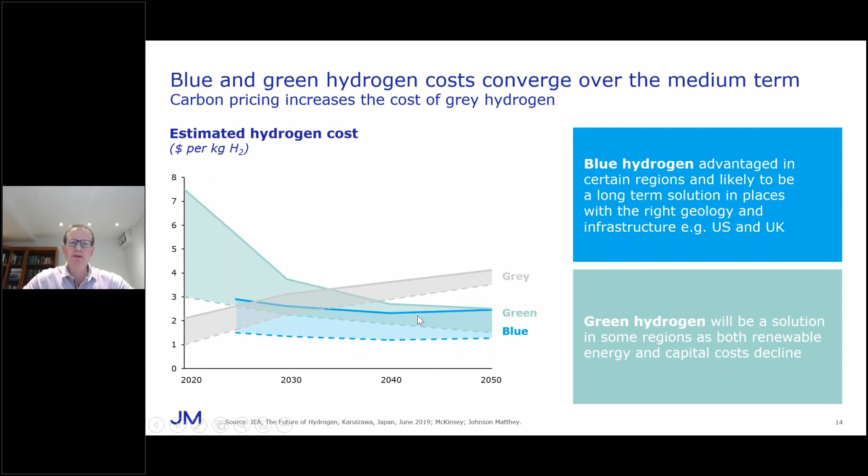And as we go forward, what we will see is as carbon pricing comes in, the grey hydrogen gets significantly penalised because it's a high CO2 emitting technology. Green hydrogen costs will come down significantly as renewable costs come down and as the cost of electrolyzers come down. But where we are at the moment, blue is the cheapest form of low carbon hydrogen in most places in the world at the moment. But what we'll see over time is a development of a mix of blue and green hydrogen based both on cost and on geographical considerations.

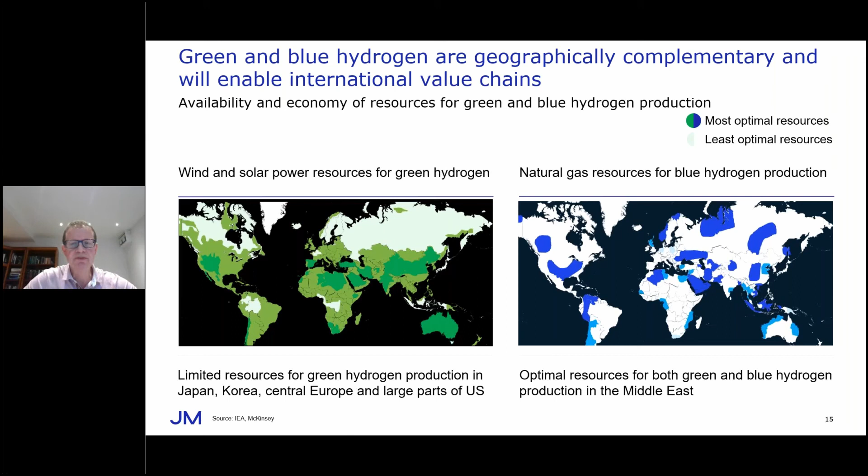So for example, if we look at the wind and solar power resources for green hydrogen, lots of parts of the world are pretty well set up to do a good job at using electrolysis to produce zero carbon hydrogen. But we've got lots of natural gas resources and lots of opportunities for carbon capture and storage in certain parts of the world. So as we move through the transition from where we are today into the complete zero carbon economy in future, we'll see both of these technologies playing a significant role. And I think importantly, finding ways to develop processes which make carbon capture and storage as easy as possible is going to be one of the key things going forward.

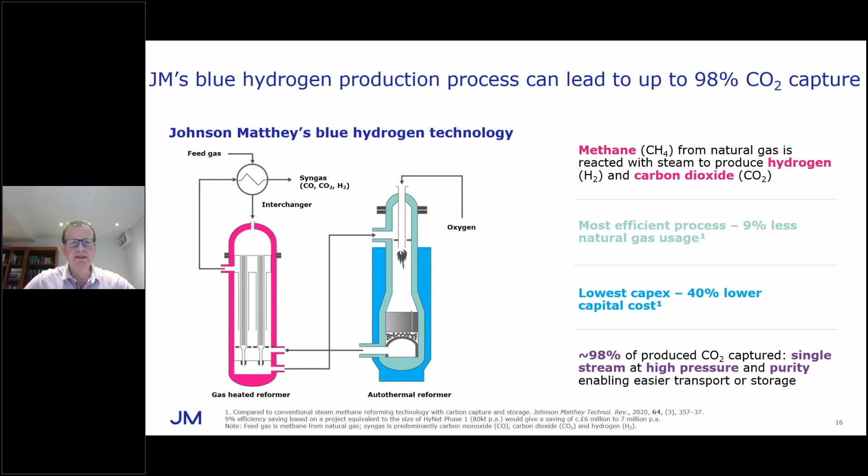One methane stream is used to heat the reformer in the first place, because this is an endothermic process. So as you burn the methane to generate the temperature, to generate the heat, you generate CO2, and then there's the CO2 that's generated at process pressure within the process. So you've got two streams, which makes it more difficult to capture the CO2 and more expensive. With this reaction scheme, it's possible to do that all in one.

I'll wrap up by finishing with the point that the hydrogen and CO2 value chains are becoming strongly linked, and this will continue to strengthen going forward. Clean hydrogen is essential to enable net zero. Using CO2 to make valuable products is going to make increasing sense, but we need lots of hydrogen for that. This is where the link comes in.

The CO2 will transition from looking at capturing from point sources, for example, towards sourcing it directly from biomass or direct air capture. And I think the key thing for this audience, as we look at the SCI webinar here,

clever chemistry and process technology are critical in enabling these moves towards net zero. If I go back to the start of SCI, it was set up in 1881 to further the application of chemistry and related sciences for the public benefit. I think what we're seeing here, with the kind of applications that chemistry and related industries can make towards controlling climate change and helping the world through the climate emergency, is a fantastic opportunity for all of us. So there are some really exciting times ahead. With that, I'll finish, and thank you very much for your kind attention.